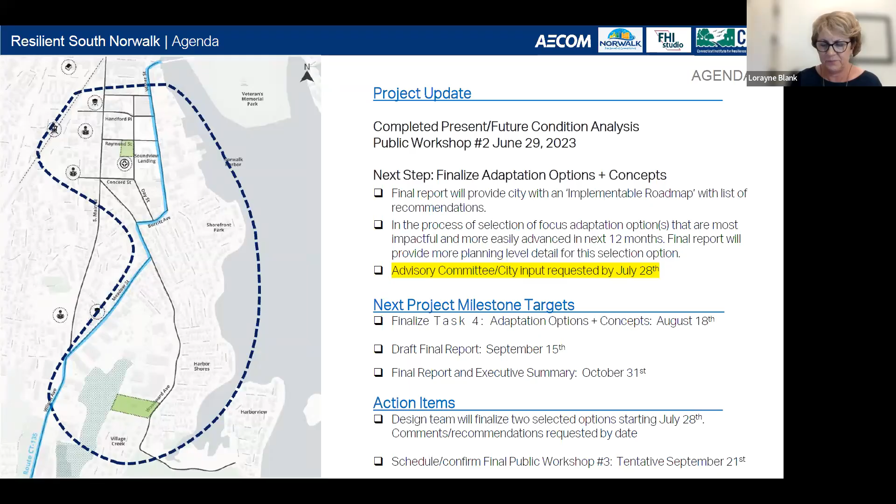So just to give, as I mentioned, we had the workshop with the public, and we came away with a few comments that were discussed. It seemed that the topics the public were interested in were: they supported planting of trees, and they were concerned about toxic waste within the flood zones. So we're going to be reviewing that to see what's in the public domain and make sure we incorporate that in the report.

There was an invitation for us and the team to come walk the site and talk about some of the chronic flood areas, so we're going to reach out to some of the residents and set up a time. And then the last issue the public were concerned about was development density. That's not really part of this scope, but we'll certainly take that into consideration as we look at everything.

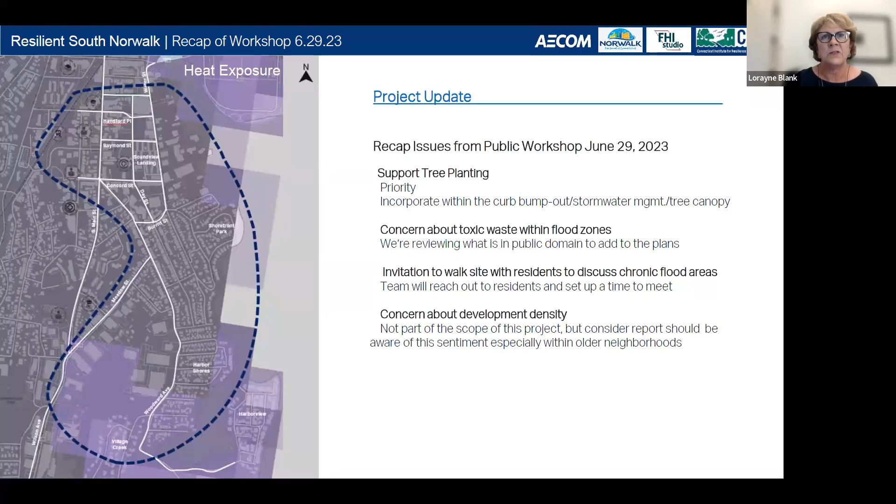So let's just kind of talk about the next steps. We're looking at completing the final report. We're going to be giving the city this report. It's going to have a lot of direction, an implementable roadmap with some recommendations to address flood and heat within the project area, which is highlighted on the left in this map, just to remind everyone since it's been a little bit of time since we looked at these maps.

We're really in the process of looking at one or two options. We've come up with a number of adaptation options, and we've kind of refined that list. Now we're looking to do the final selection of one, possibly two options that we'll get much more detail in, so as I go through this we can discuss that. And we're asking the advisory committee if you might be able to give us some thoughts and input, probably by the end of next week, and then we'll start to move forward on that.

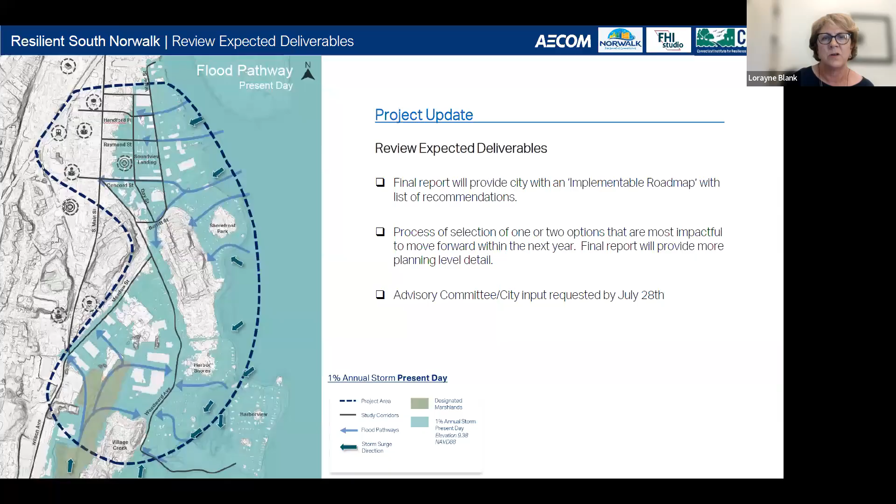So let me get into that. At our last meeting, the last presentation, and at the public workshop, we talked about all these different, this matrix of adaptation options that we've been looking at to address heat and flood. We've come up with like a dozen of them, and they range from adaptation options that address heat all the way through flooding and also for safety.

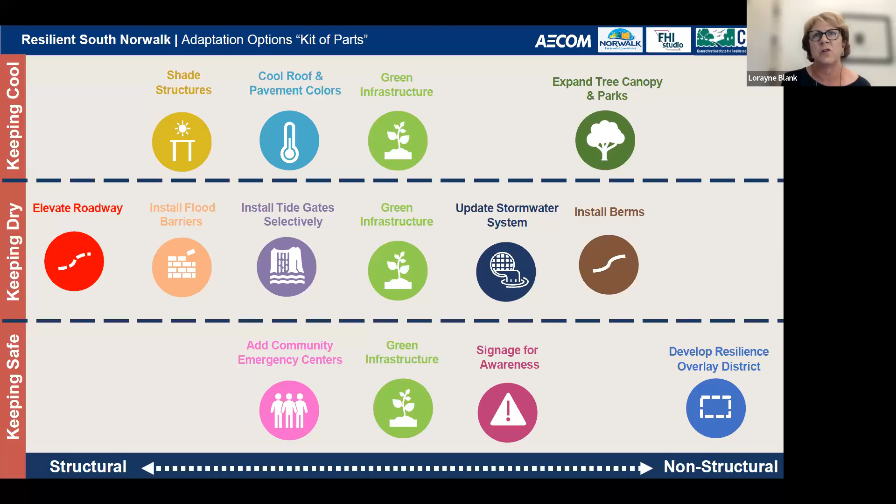In this matrix, we have divided this into, on the left, things that are much more structural, all the way to the right, which are much more non-structural. And we've started to apply it and looked at where we think some of these adaptation options can be used throughout the study area. So the map you see on the left coincides with the matrix. This is kind of the focus of today. We've taken all the dozen of these different options, and we've refined it to about 5. This is really looking at the focus of the study, so let me just kind of go through those.

The first is looking at inclusion of a resilience center. You currently have the South Norwalk Elementary School that's going through planning and zoning. So one option is to work with the team putting that together and consider having it designed so that it would also be a resilience center. We would look at guidelines that could be created, not only for that, but also for future developments or renovated existing facilities to support the community during flood and heat situations.

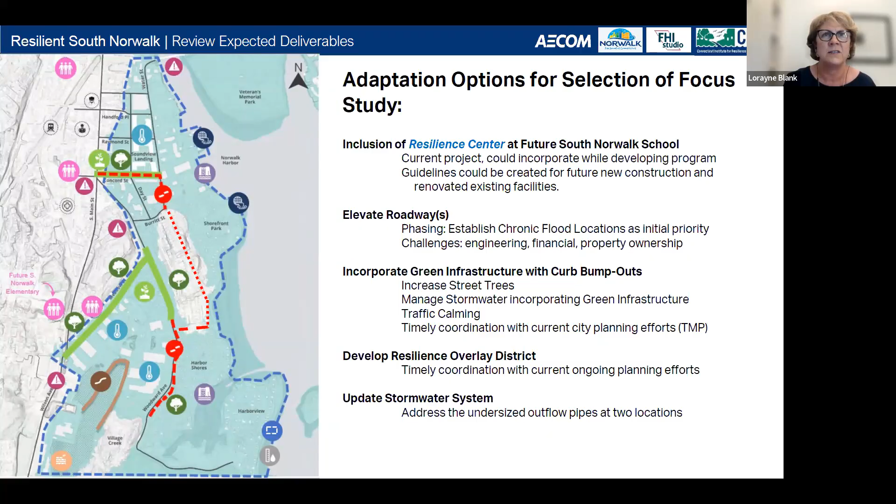So this is the first one: the idea of a resiliency center. And as you mentioned earlier, if we looked at this, we'd have to consider if the school would be appropriate for that, and if so, what would have to be included in the design of the school. We just looked at the plans that were submitted a few weeks ago, and these are all things we would decide to look into in more detail.

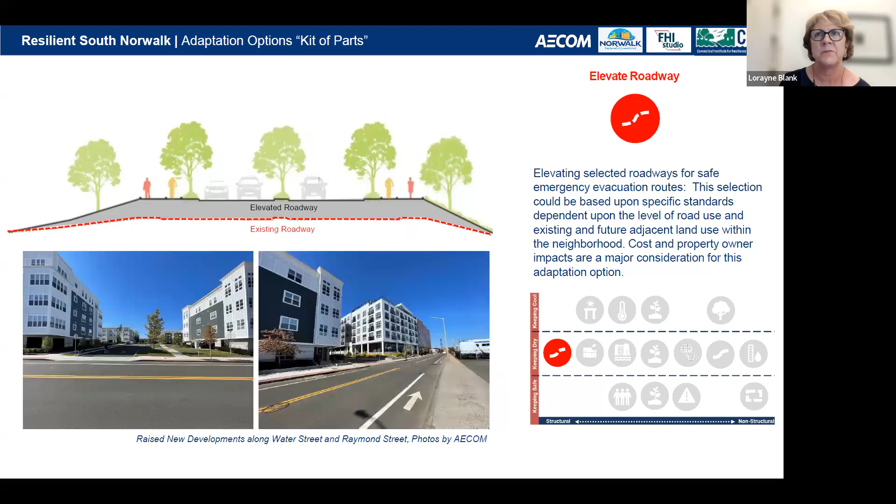Elevating the roadway, we would look at something similar to what was done at the intersection of Raymond and Day Street. We'll be looking in more detail at other locations to address flooded areas like Water Street and the lower part of Woodward Street. Incorporating green infrastructure within curb bump outs, including permeable paving and street trees, would help alleviate some of the high heat areas, such as on Woodward Street and Concord Street.

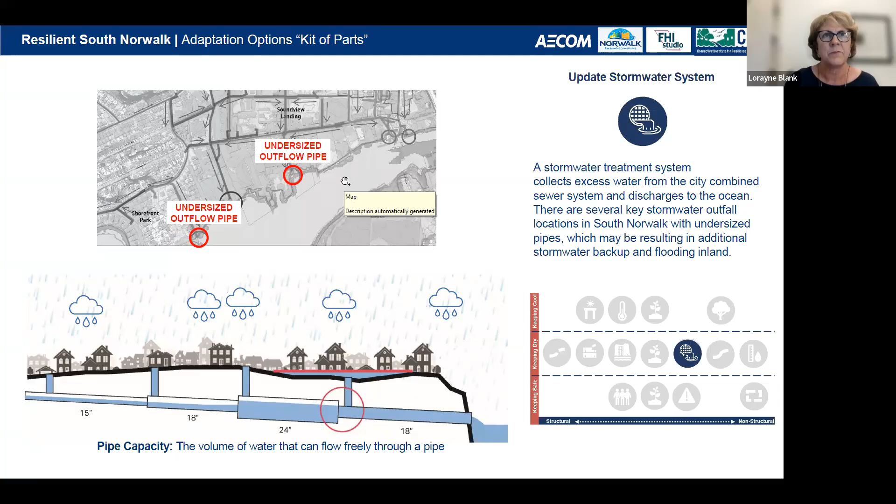So we can open this up to questions. Our team is here if we want to discuss any of those five options and see if there are other questions. I can go back to the first one for the school. We've got 40 minutes to go through here and get feedback from anybody on whether any of these seem viable or should be priorities for the city to detail further in the report.

I think there are some other worthy projects that could benefit from this—again, the identification of schools. We have relationships with the Norwalk public school system, so if we had to stand something up quickly, we could. But we do have our pre-designated shelters for overnight sheltering, and our cooling centers and warming centers identified as needed, trying to stay away from the schools. So I don't necessarily see this as something we'd want to focus on.

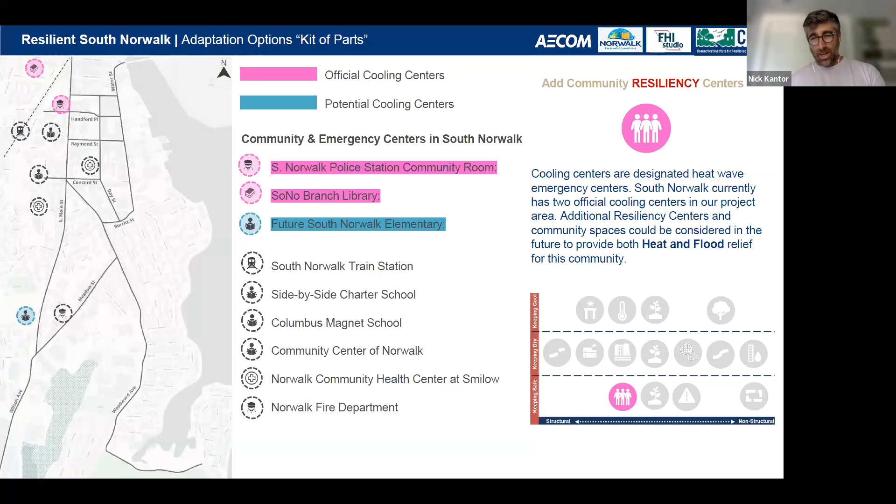Is there a way generally to get a sense of the impact you think these options are going to have, or what you think is most valuable to go after—what's going to have the biggest benefit or highest ROI? Any sort of way of getting a sense of, if you had to just do one of these, which one would stand out above the others?

We've been going back and forth on that, and we're starting to do a cost-benefit analysis to look at that aspect once we get a little more targeted. When we were talking earlier with the CIRCA team, we're hoping the option we choose is something that could be really doable and get started within the next year, as far as going for funding. The resiliency center and some of the infrastructure updates could be done pretty quickly without a lot of other coordination, compared to, for example, the elevation of roadways, which would take a lot of coordination and engineering and design.

That's super helpful. Just trying to get a sense of what's most valuable to do at the end, since we can't do everything. But certainly the roadway elevation is impactful.

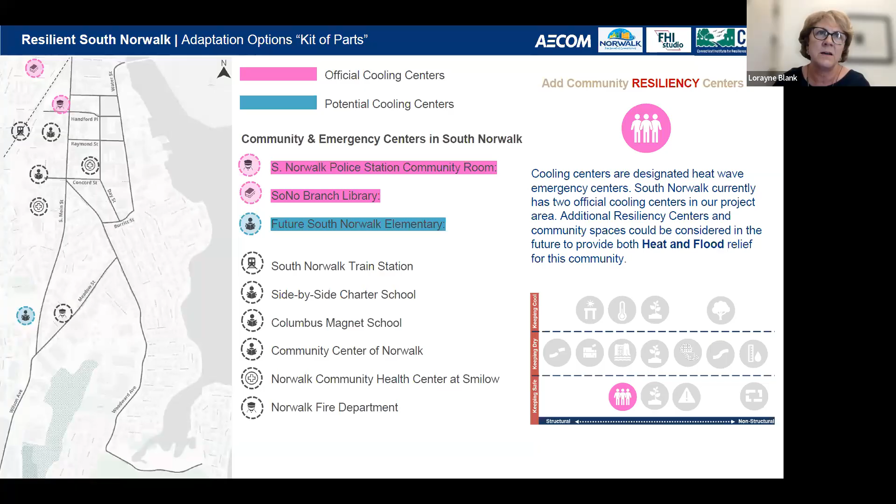We've all looked at these maps for a number of these meetings and seen the connection between the lower part of Woodward and all the way up through. That could be the answer at the end - like the most impactful thing is that roadway improvement, and that's where you want to spend effort, even though it may be most expensive to do, but it still may have the ultimate benefit there.

Apologies if you've talked about this, but are you intending to suggest one of those options, or is this an either-or type of thing? We're gonna present and have in the report all of these options included to some level of detail, but we're gonna do a dive into one of them, maybe two, with much more detail, depending on their scale.

It seems like the school is a very different scale than the road - quite different. And also, the school, I think personally, the road improvements or the other items you mentioned would have a greater impact on this community than a cooling center would. But anyway, I know there's a lot of monetary difference too.

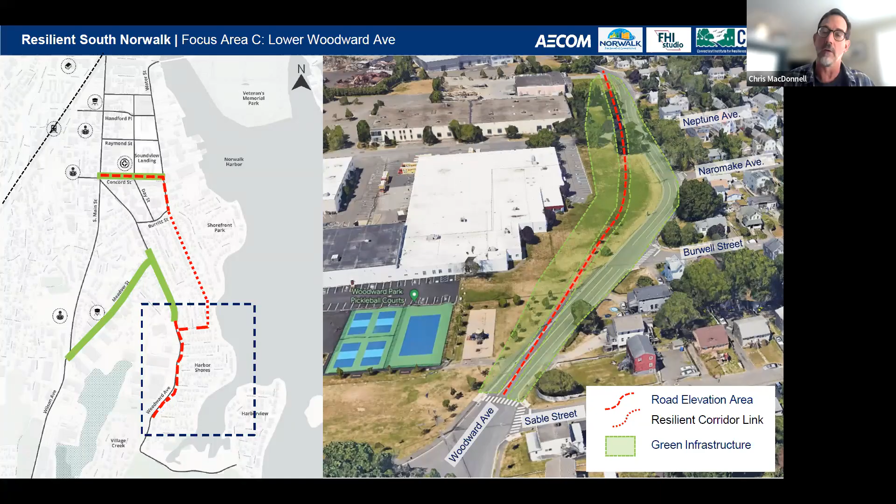As long as I have the floor, the other thing we discussed - you guys didn't propose any berm area, so I'm curious if you have any ideas about that. But then the other thing is the drainage system. The issue with flooding is not rain related in terms of getting rainfall out of the zones - it's preventing Long Island Sound from entering the zones. And I think the most important thing we could do to prevent the nuisance flooding is to put backflow preventers on all the outfalls from any of these areas, because it's backflow through the drain system that bubbles up onto Water Street, which you'll see at a lot of full moon, high tides, certainly half a dozen a year at all the king tides each year.

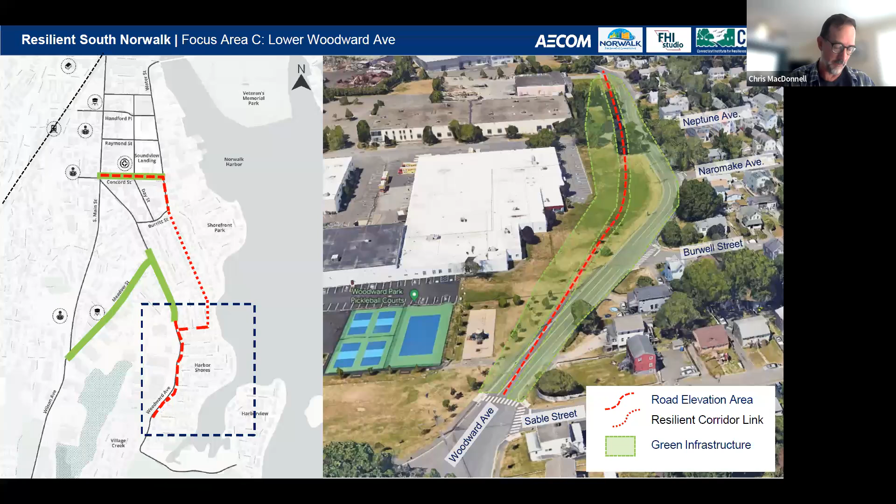Okay, we've just gone through a cycle of that last month. We did that in the past - unfortunately it didn't work, installing all of that.

Well, and that's a good segue. I was going to say that we have Susan Bemis on the call, and I know we've kind of quickly went through this with green infrastructure, and we had considered doing these curb bump outs on the upper portion of Woodward and on Meadow Street to kind of reinforce and improve both of those roadways for pedestrians and bikes, and be able to address some of the stormwater. I might just turn this over to her to talk a little bit about this design, so we give enough time for each one of these.

Oops. Sure, thanks Lorayne. Hi. Okay, thank you. So I can't see everyone, so - no problem. And Chris Henry is here with me as well.

So I think we'll sort of chime in together, but this part of the kit of parts is really trying to capture some co-benefits. Green infrastructure, as I'm sure you know, can help with runoff, but it can also help with water quality. And these examples that we're showing can help with heat island mitigation and just providing more green and less pavement to provide a cooler walking and pedestrian experience. And then also can help with traffic calming and can really try to work with some other existing planning that's going on to sort of find a way towards implementation.

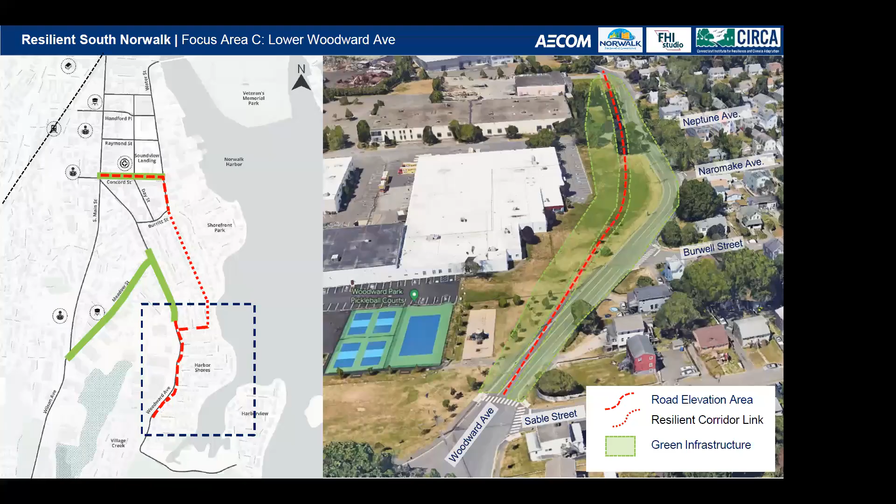That we heard both from the public as well as stakeholders in neighborhoods like South Norwalk. Really, the intent is to make sure that as any one potential project starts to take shape, it's folding in all of these opportunities. So if, for example, the transportation department has a street project and they're looking at traffic calming, well, let's make sure that's taking into account the resiliency approaches, the cooling, the materials and green infrastructure, and vice versa. As we're looking at some of these potential street interventions that, in this context, are very much focused on flooding and resiliency and adaptation - these are calling out exact interventions that emerged in the transportation master plan and that fit very well in the city's ongoing effort to calm streets, to make certain neighborhoods more walkable, more accessible, and so forth.

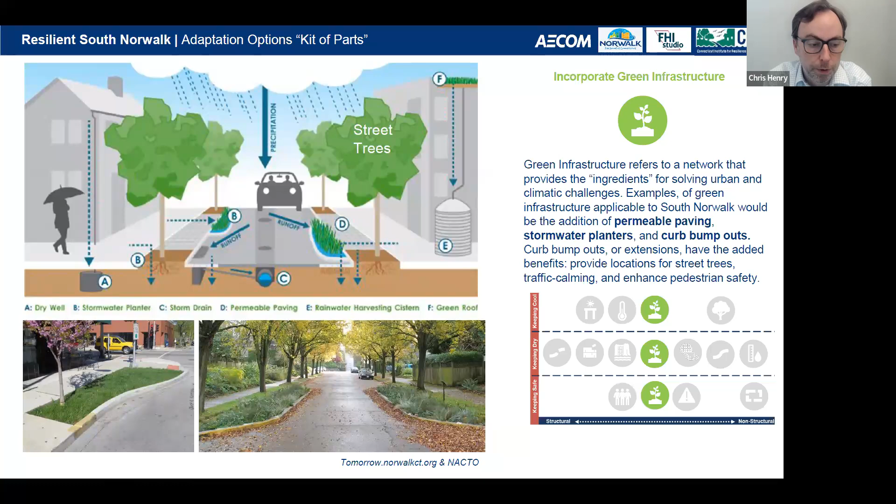But did these things impact in the way that Chris was saying, like preventing flooding coming from the sound at all? Because it seems like this is only going to help with rainfall to a degree, even versus flooding - the real flooding, where the real flooding's happening, if I'm understanding correctly.

If we're looking at an intersection-scale intervention, a curb extension or something like that, particularly from a transportation perspective, that's a very localized effort that's not going to solve the coastal flooding issue. That said, anything that helps mitigate stormwater runoff and helps with water retention is a net gain.

I think that gets back to the point about the extent to which you tackle all of Woodward Avenue as a project versus start to put into effect some spot interventions that still work you towards the larger goal but might take more time, study and planning. A lot of these things are very compatible short term with other projects and initiatives the city might be undertaking now or in the near future.

But having these projects talk together is really critical. And this does fold into looking at this green line here. This is the Upper Woodward and Meadow Street. It does also address some of the key issues within those corridors, especially with the addition of the elementary school, and again, being able to have areas where we can locate street trees.

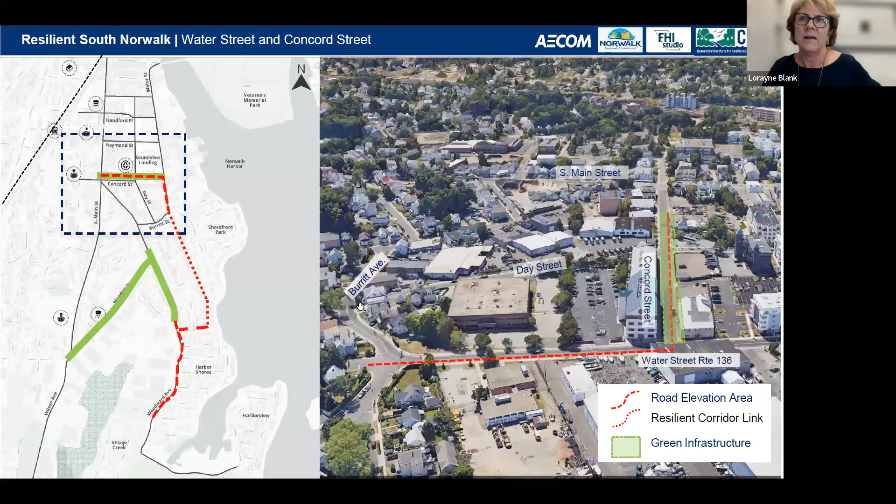Thoughts? Well, we talked about the stormwater system in relation to the piping and the backflow. Do we want to have any comments or thoughts about the overlay zoning district?

I'd love to see some language if you have it. I think where we're at, I'm not sure exactly when you guys are going to be report complete, but worst case for us is if the regulations get voted on and approved at a certain date in the fall, and we don't have anything fleshed out yet. I'm not sure if you're going to have, because a lot of times the way these plans go is they have some guidance in terms of what those regulations are, or point to models of what they could look like, but then we still have to go in and actually fit the language for us and massage it quite a bit.

So my guess is that six months post adoption of the new regulations, we're probably going to have a couple different workshops where we go through things that just need to get cleaned up or aren't working as we expected. So even if this plan gets adopted, and that's one of the items that comes out of it, which I think would have a lot of merit for us, it doesn't mean we have to act on it right now. We have an opportunity to incorporate that six months, twelve months down the road after the new zoning is adopted.